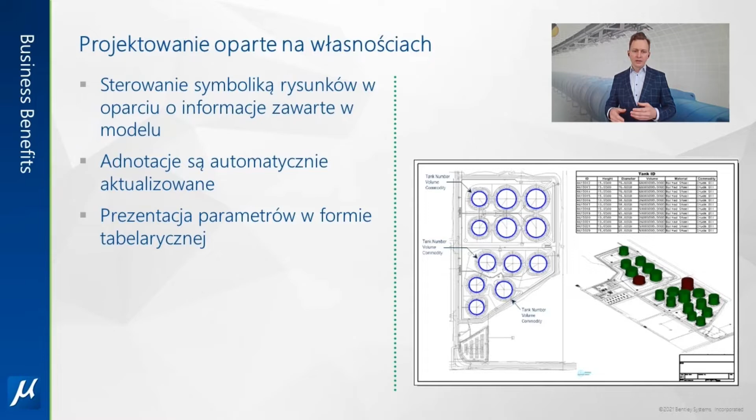When creating documentation, we base it on the pre-prepared parametric model. Those drawings have individual elements which can be included in the project, and these can generate information with full integration with the model, which means that after preparing a sheet, you can still make changes which will be reflected in the documentation.

Now, where can MicroStation be applied in the design process? First, terrain — you can usually get information from surveys, as our software works with different formats, and it's easy to configure.

In architecture, drawings are based on models, which means more accuracy and more reference possibilities. In the final model, you will be able to add more individual references, and you can easily handle this, and create views — this is the first step to BIM.

In technical design, you are free to design architecture elements, and with item type features, you can freely report things. Combining all these features with the efficiency of MicroStation, it is a wonderful tool for coordination.

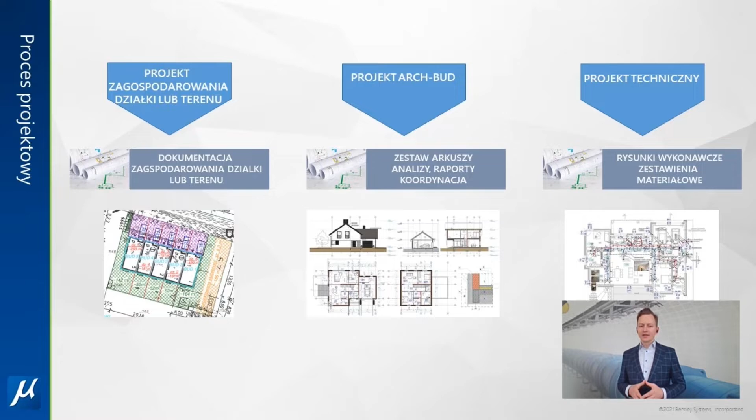What needs to be stressed is that in individual stages, you can involve different applications, and the common denominator is always the DGN format. So that's the introduction — now let's go to the substantive part of the presentation.

Welcome, ladies and gentlemen. My name is Dorota Mulińska, and I have been involved with BIM since 2016. I started with inventory taking in Architect and Revit, both on modeling and projects, and I have also been providing training in Bentley systems, where as a consultant I am in regular contact with users.

I concentrate on MicroStation and OpenBuildings Designer software, particularly for configuration and creation of company standards. I also concentrate on calculation software and generic components, and I teach some courses at AGH University in Krakow for postgraduate BIM studies.

Now let's go to GeoPortal. On the right-hand side, let's select data to be downloaded. We can find NMT data. I select option number 1, and with this I can upload point clouds for the entire country.

Now let's go to the area of Krakow. You can see there are some tiles, and these are separate point clouds, and we need to select which one we want to use. Next, you click on one tile, and what you get is an option to download the point cloud as LAS format.

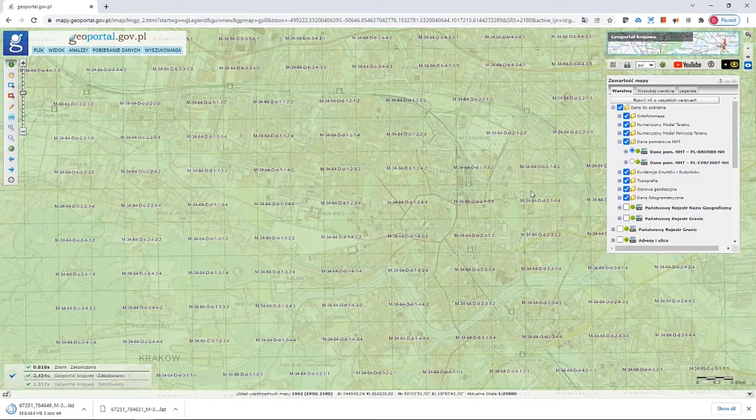Let's select one tile, and next, we will go to MicroStation. Let me mention that this data is totally free of charge, so it is good to use it.

Now let's go to MicroStation and create a new file. Let's name it terrain.

Before I import point clouds, we coordinate the file. On the right-hand side you can see this mark - this globe with this cross. It means that the file is not coordinated.

So to do this, you need to go to Utilities, then Coordinate Systems, and you will find tools to import and export geo-coordination systems. If you have any references which have geo-coordinates, you will be able to download those geo-references from the pre-existing reference, or you can send them to a reference.

But in this particular case, I will use the first option, from library. That's where you will find libraries with geo-coordinate options. You can also use search - you need to key in the name of the system, and the entire library will be searched.

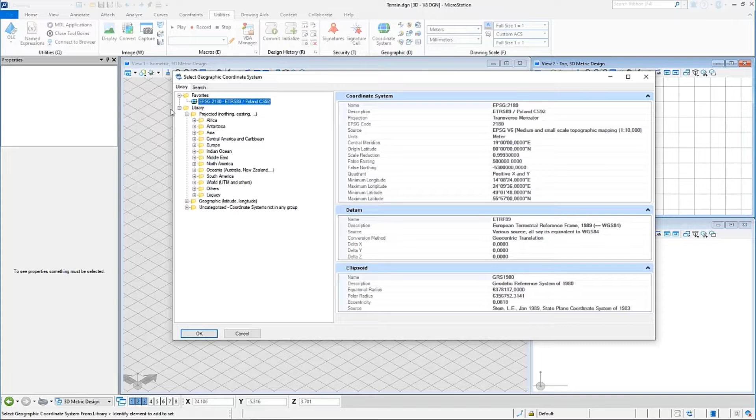You can also save some of these as your favorites, and they will be displayed at the very top. So I will select System Poland CS92, and as you can see, this file is now geo-coordinated. We have detailed information on the geo-coordination system, and on the bottom right corner we've got green icons telling us that the file is geo-referenced.

Next, you need to import cloud points. Let me use the search field - I will type in point clouds and I will find the tool. It will show where exactly in the software this tool is available, and I can also start it from here. So I will select Attach Point Cloud, set the format to all files, and select a point cloud. We've got some additional settings here.

The software will automatically convert the LAS format to POD, which is a Bentley native format. And so, another cloud - let me open it. OK, save as POD. Close the window, and now I will zoom in to the geometry of the point cloud.

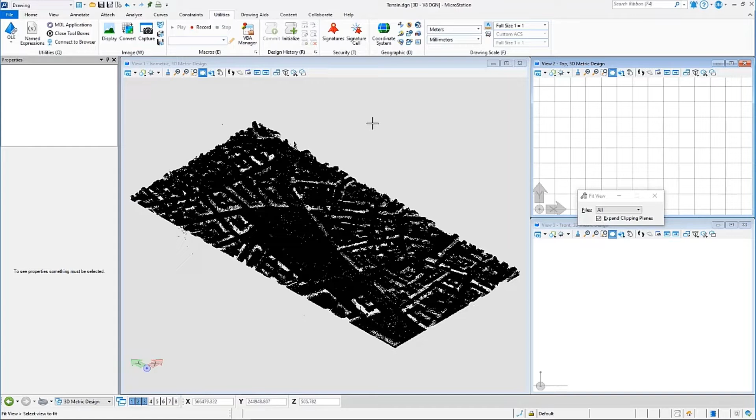What you can see here is the imported point cloud. Importantly, the cloud is geo-coordinated - so the cloud downloaded from GeoPortal has its coordinates and is located in the right location.

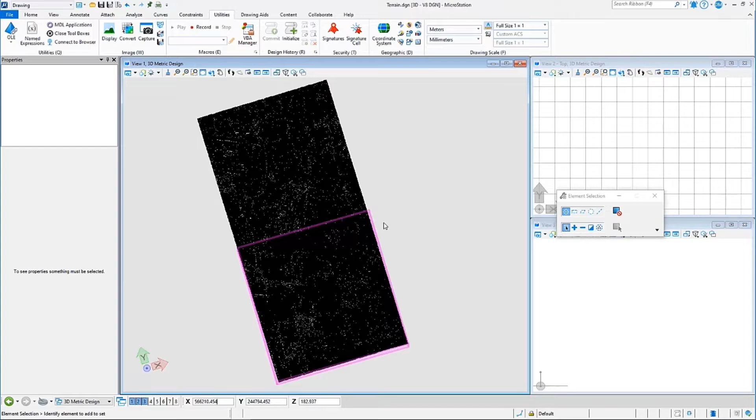Additionally, we have tools to monitor how the cloud is displayed. It is not very attractive, the display mode, but if you go to View Attributes, and under the file, if you have the point cloud here, you've got additional options to manage the view of the point cloud.

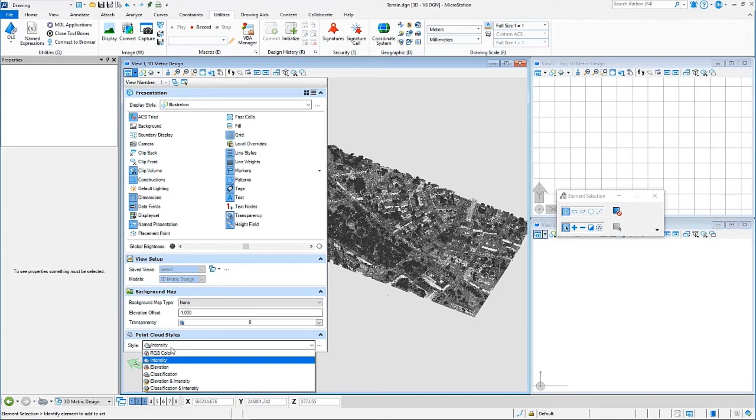You can select like intensity, so this is the grayscale. Another way of displaying is by elevation, so you can select by elevation of the elements, or next you can use classification. The cloud in this GeoPortal is prepared correctly, and we have classified elements, so using classification you can see where you have greenery, buildings, roads, etc.

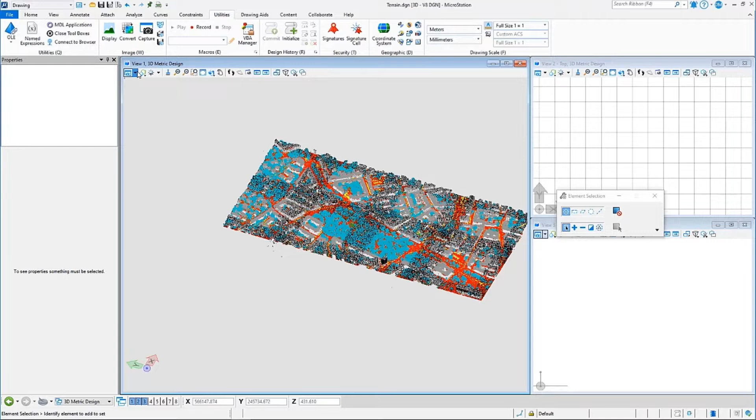So let me use the most attractive mode of displaying - this is RGB, so these are the natural colors of the geometry elements.

Additionally, this cloud has a defined density, which obviously cannot be changed. But what we can change is the thickness of the line. The cloud is based on points, so if you go to line thickness and change it to 3, your cloud will get some additional volume - each item will be thicker, and that's what I'm doing now.

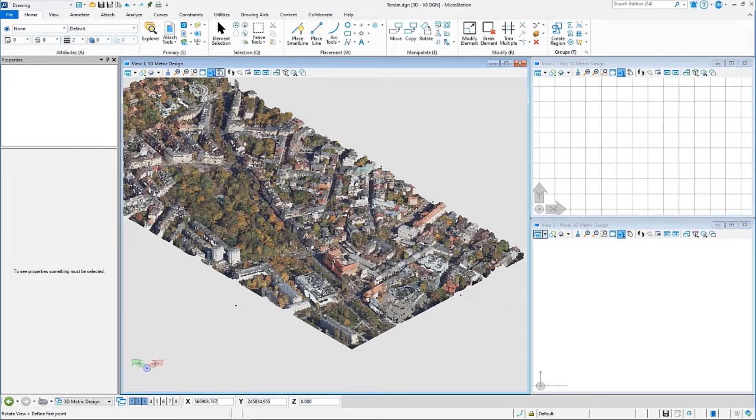Now I'm going to discuss how to plan an underground railway in Krakow. So we can go to the top view.

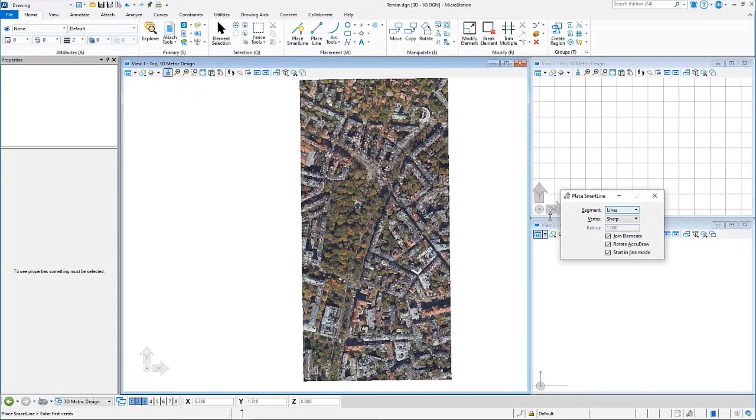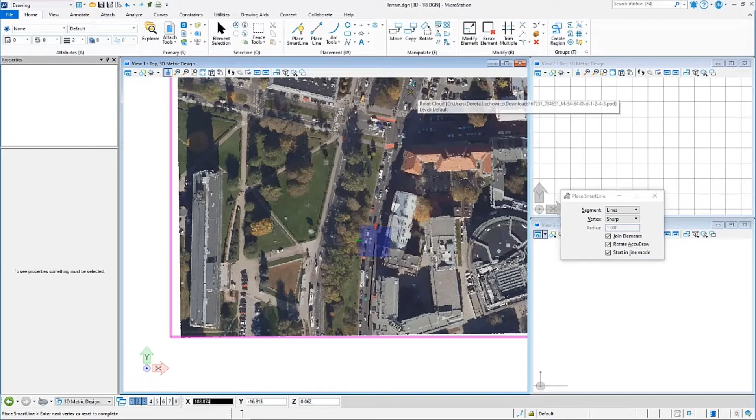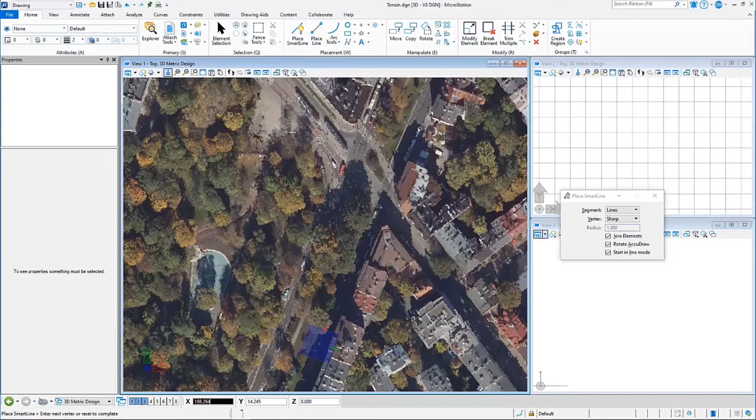That's where you can go to the insertion of lines, or curve, or place line - and that's how you create a line for our future underground railway. So we've got the area, and you can drag and snap. This line will be created on the surface of the road.

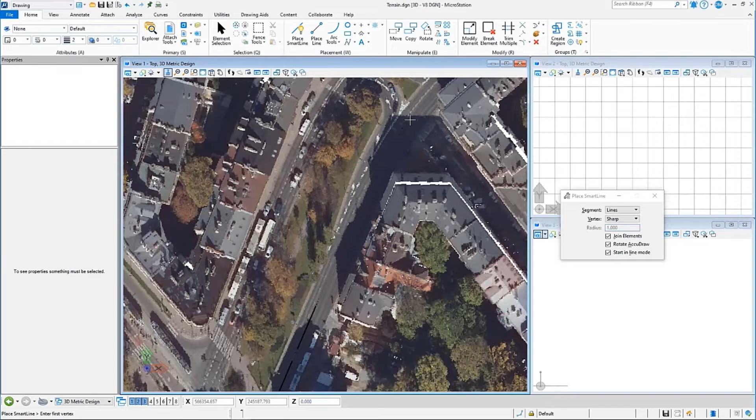Next, let me select the line. Let me go to the side view, and I will drag it by 20 meters downwards.

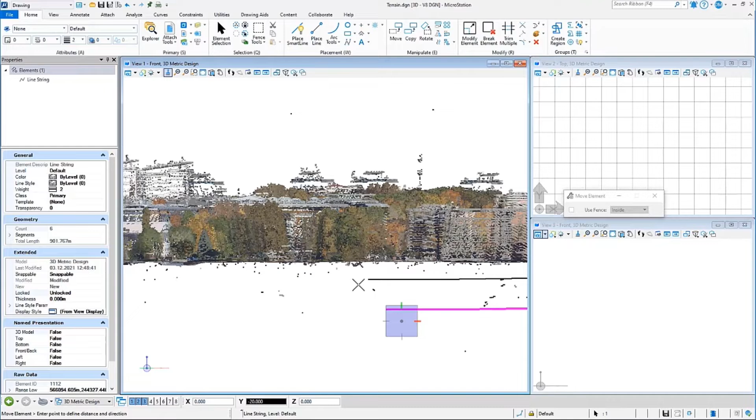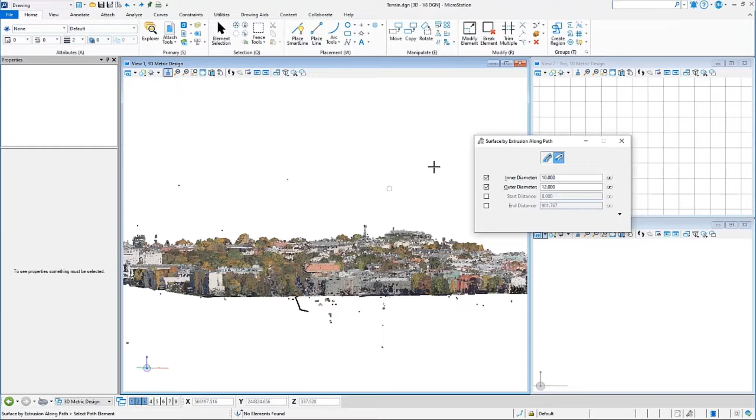So now we have this line of underground railway. Obviously, you can also use MicroStation tools for modeling or extrude along, select a profile, a line, and cut the profile along the line.

But what I wanted to show you is GenerativeComponents for parametric designing. As for now, the software is available as OpenBuildings Designer, OpenRoads and OpenRail, but next year it will also be available as a primary software, MicroStation, and in all types of software based off MicroStation. So for that end, let me launch the software.

That's GenerativeComponents. Let me open this pre-created file.

Very briefly about the software. On the left-hand side, we have this transaction pane. That's where you have all the steps one by one. Of course these can be combined or separated or change names. So this is a short history of how the geometry was created in this pane.

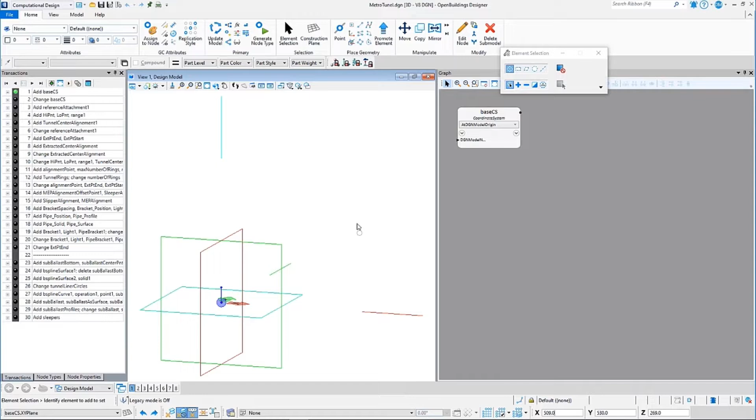And each design, each project needs to be started with the primary system. So this is the base coordinate system, which will be the starting point where we will assign all other geometry. And I will hide this starting point. This will not be visible in the 3D image view.

And I will connect some references. So we've got this reference tile. That's where you need to select host coordinate, and you need to select the file you want to connect. And the file I selected, this is the terrain file, which I have just created. And I will use now the tool.

So this is the reference which is displayed in the file. As before, of course, we can change how it is displayed, how the point cloud is displayed.

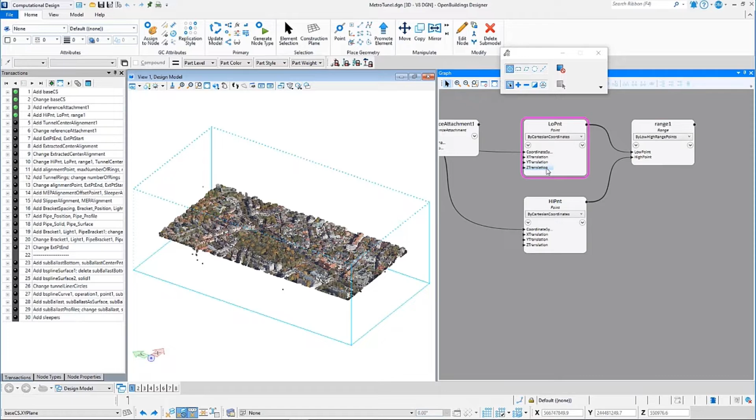And so let me now create 2 points and a so-called range box. The range box is for the geometry to be inside, and for us to be able to read information and geometry which is located in this box.

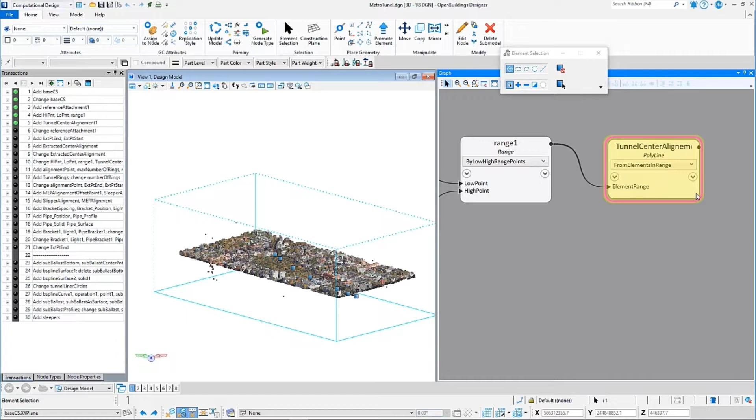To do this, I need to select the polyline tool. So this is the type of geometry which is included in my reference, and that's also where you can select some other options, like if you know which layer particularly this polyline is located, you will be able to type in this name. As we have only one polyline, this option is not necessary for us to use, but this tile will help us find all the polylines in this reference.

So now I can hide this reference, I hide this tile, and all I have is just my polyline.

What we can do now is create some additional points in this polyline using the so-called beginning and end parameter. So the beginning is 0, the end of the polyline equals to 1. And depending on the value I type in, you can control where the geometry is created.

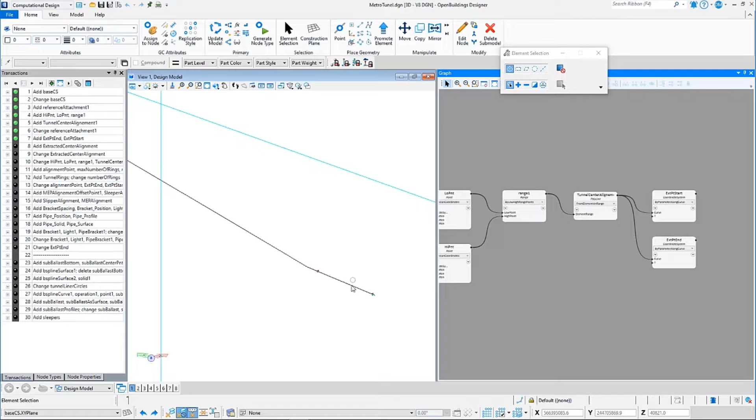And for the purposes of this showcase project, I will use just this short section, and then I will do the entire line. So you can test this on a short section.

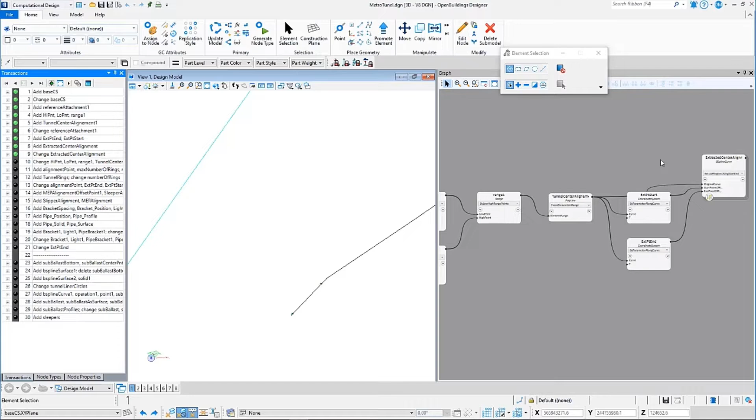Let me now launch another point. Let's create the polyline from one point to another. So we create a section of the entire polyline from the starting point to the end point.

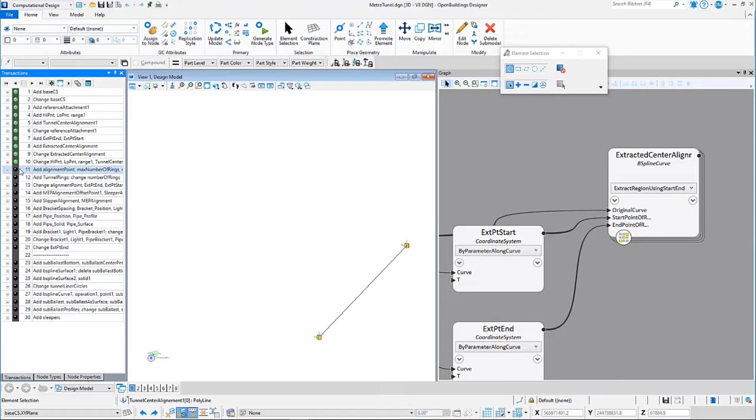Let me hide other elements so we can see just this section, and in the next step I will skip describing all the elements, but this is how you create so-called sliders. So this is to define the distance between the elements and the number of elements, etc.

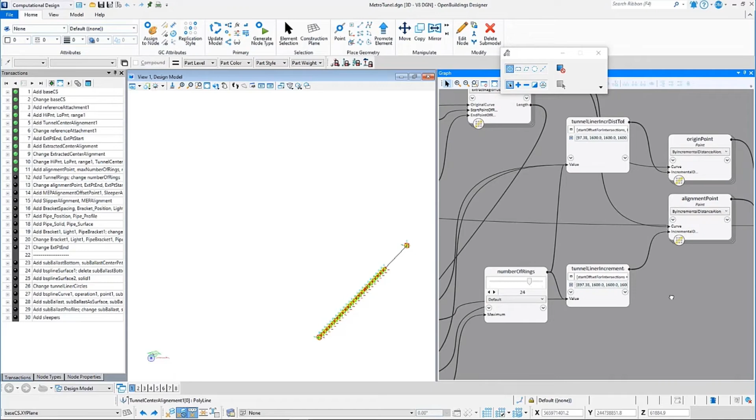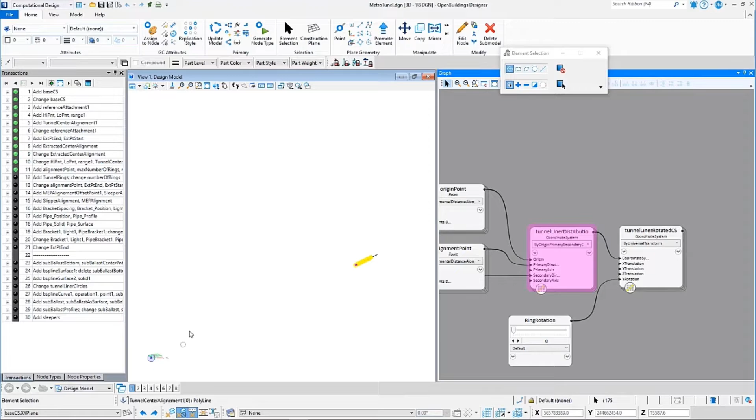And that's how you create points in the polyline where you will add a so-called coordinate system. And with this, they have X, Y, Z directions adjusted to the polyline. They are not equal to the starting point; they are adjusted to the polyline.

Next, we can create or connect a cell. This is a block. In each of these points, this is how we created a tunnel. But in fact, this is just one geometry multiplied in all these points. We have a very small section, but we could do that on the entire geometry.

Next, we will hide all these coordinate systems, not to distract geometry. The next step will be creating a shifted coordinate system. This alignment needs to be used as the center line.

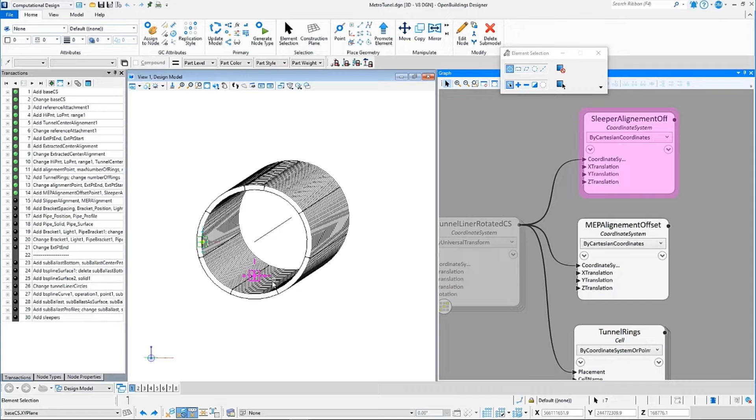And we can create another one as a bottom if we want to add tracks, or also a lateral line, side line. That's where we will use X, Y, Z values collected from the previous coordinate system.

And you can add this offset by a particular value on X. And you can also connect this with the sliders, and you can slide this distance manually.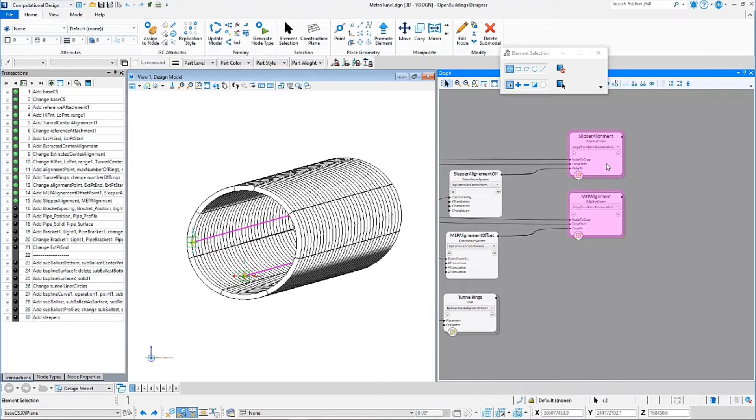In the next step, we create a copy of the line. That's the copy of the center line moved towards one or the other point.

In the next step, we create additional offsets, as the geometry we are going to insert will not be on this entire line. Sometimes we can move to the left or to the right. We can create things, and I have hidden those elements not to distract the geometry.

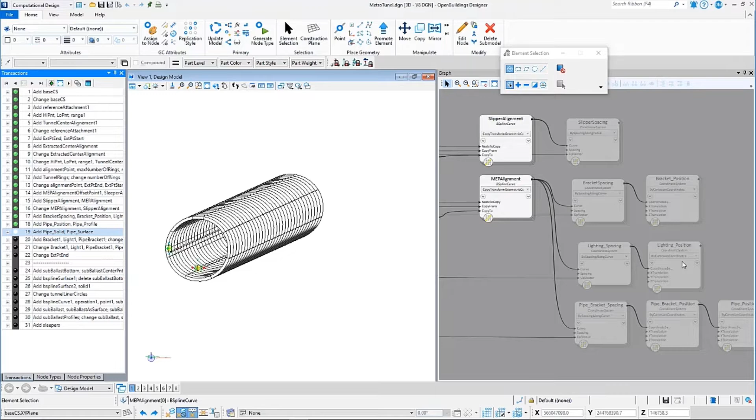And in the next steps, we will create this railing. To do this, let me switch it on for this to be visible. This one can be invisible.

So we have created wheels, multiple points based on the coordinate systems, and we have also created this layer along these elements.

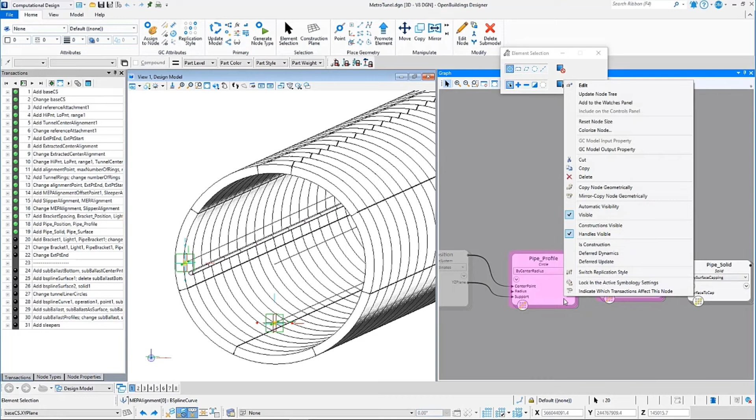And we also want this geometry to be full inside. So in the last step, we have created solid. So this makes geometry full. This can be hidden.

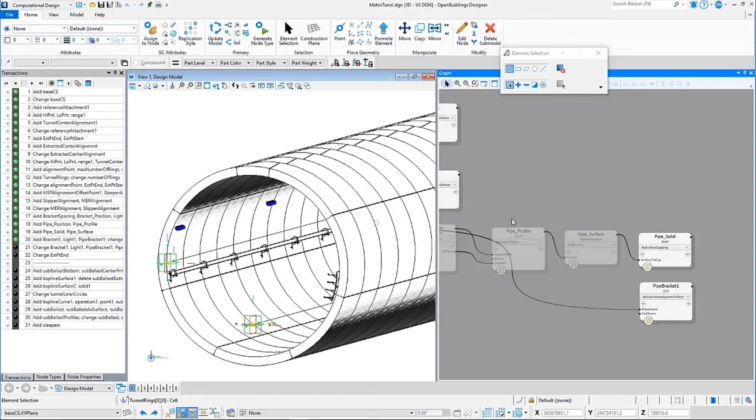And next step, as before with the rings of the tunnel, now we can add some more additional elements, like railings, lighting, handles, and this is how we can quickly create even minor elements along the tunnel. Obviously, this is only a small section of the tunnel, just for the needs of this test.

And what we will do before we finish, this is a script. The script can be used multiple times. So if we want to implement a change in the alignment in the original file, in the starting file, in the terrain, if we make some shifts toward the left or right...

...so all you will need to do is refresh your reference. You will need to go through the script again. You need to recreate all the transactions, and this geometry will be adjusted to the changes implemented.

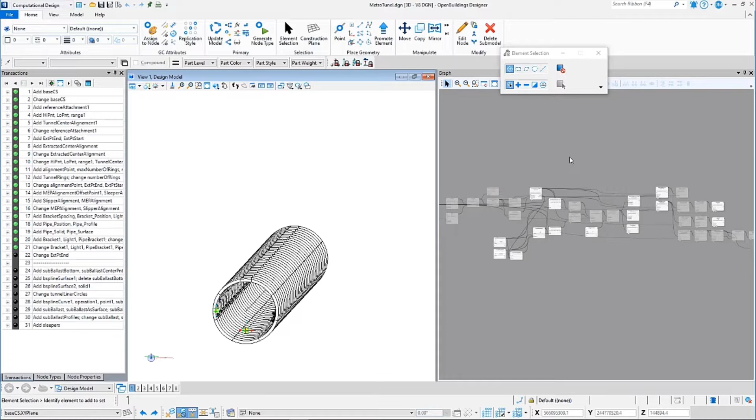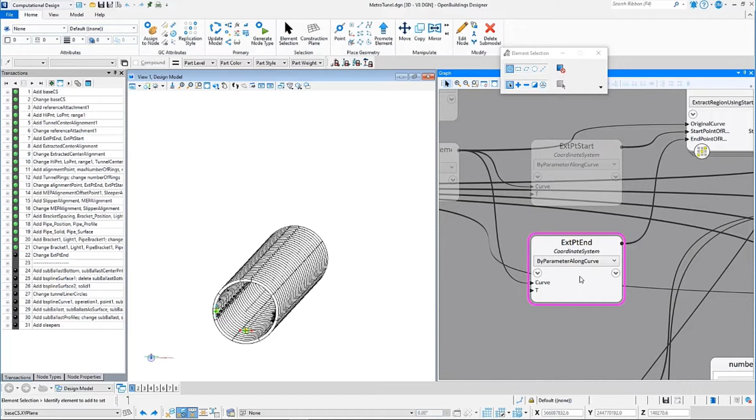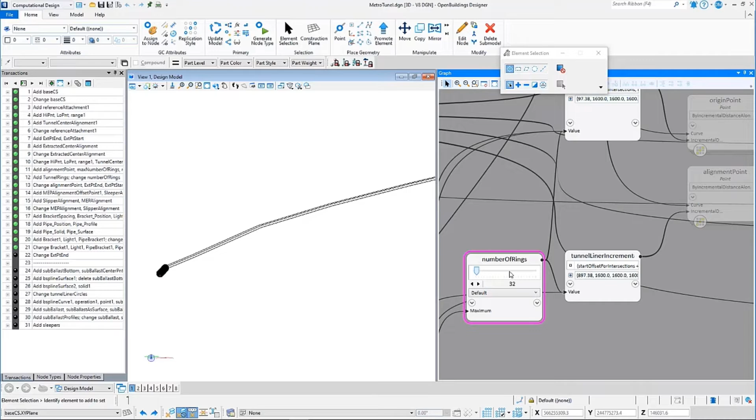As I said at the beginning, we are working just on one section, but now I can go towards the first element, and let's say I want to go towards the end, to extend this polyline to the end. So now I select the entire polyline, and it is refreshed, and a copy of the polyline which have been created are also refreshed automatically, and additionally we can increase the number of elements along the line.

And as you can see, this model is now refreshed. We have the rings along the entire tunnel. Also inside, the elements have been created.

And before I finish, I will hide these elements which I do not need, this one, and also the lines, and also the central line.

And what is left, we just need to return to MicroStation, and I will go to the reference and connect the tunnel.

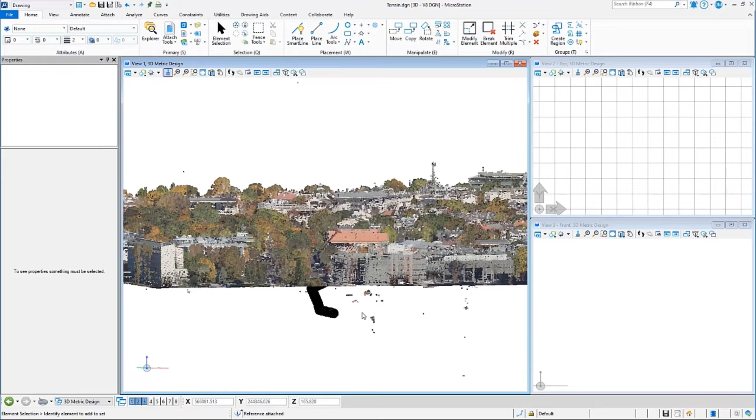Well, please note we have our tunnel connected, everything done fast. As I said, we can change this alignment and the tunnel will get adjusted and reference will be refreshed. And what we will do additionally here, we will go to the top view...

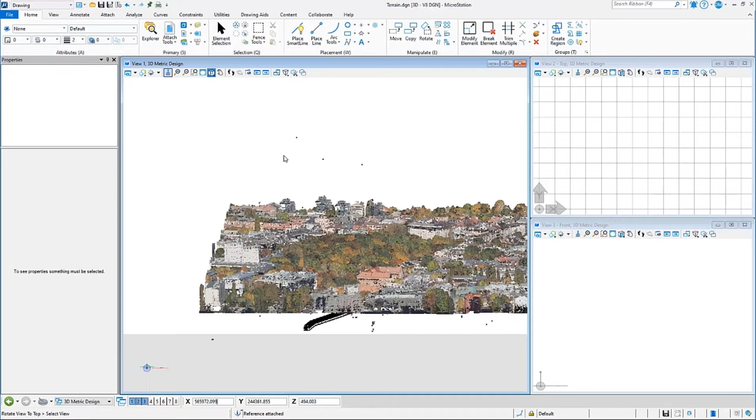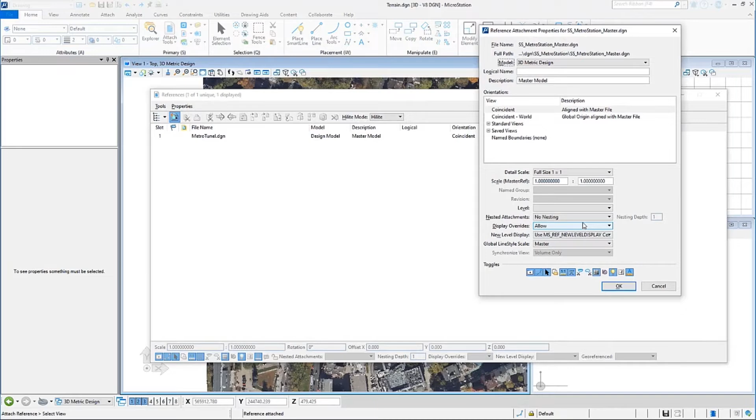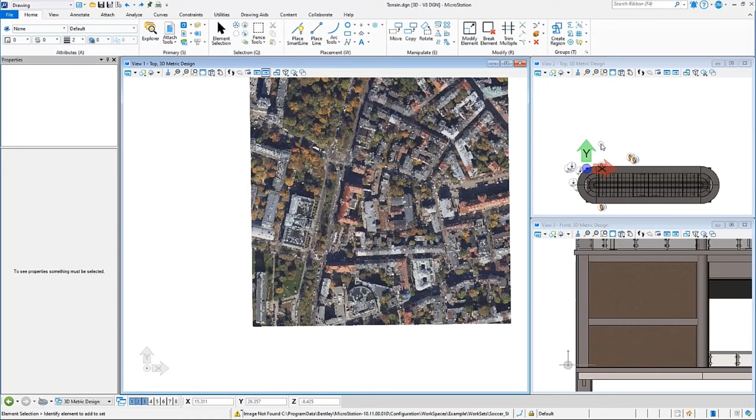...and import an additional model of the underground station. Of course, this file, not geo-referenced, is created in 00 of our file, therefore it is located very, very far away.

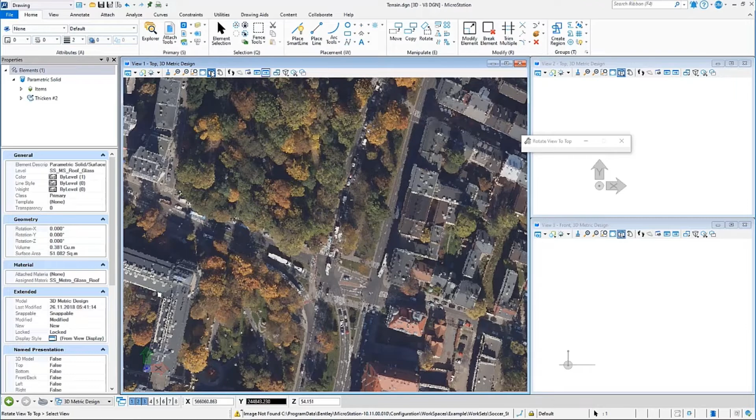With right click we can select move reference option and shift it to this location, for example. And then let's go to the side view. We will have to lift it up a bit.

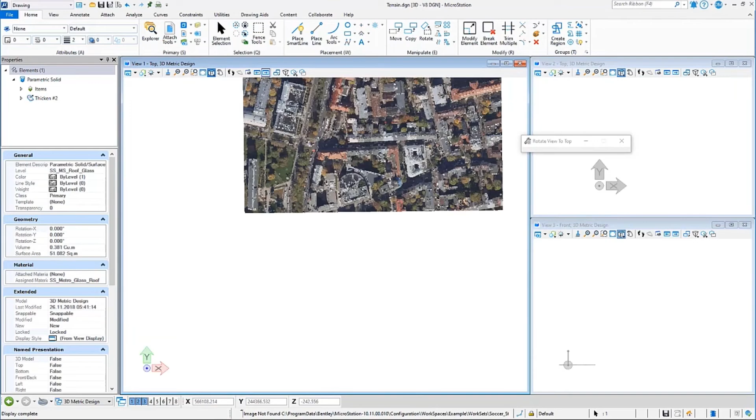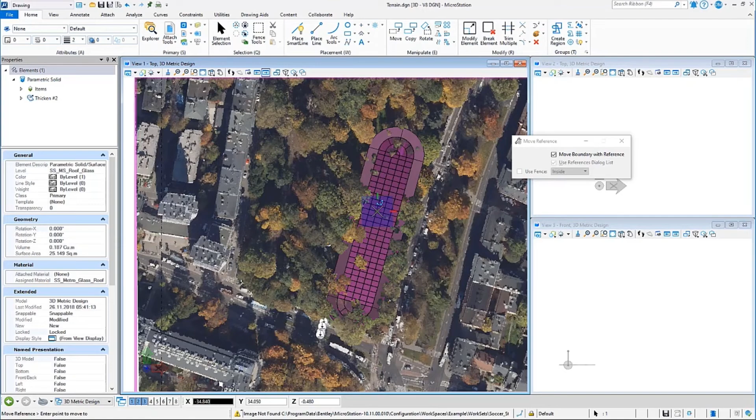Well, let's turn it. Rotate, shift. And what we will do now is, of course, the cloud is disturbing us a little bit. It's going into the area of our station, so we can edit it.

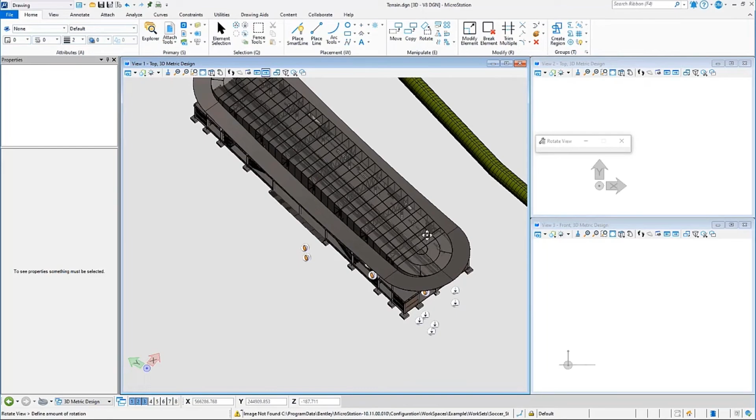Now let's move back to the Cloud Management tool, and for a moment we will hide the clouds. Next we will go to the tool named Extract Faces/Edges, and thanks to this, in our station we can select given elements, or we can outline it manually, or we can select elements. I will focus on the roof because we do not want the trees to be entering the roof space, and we can select such an option here.

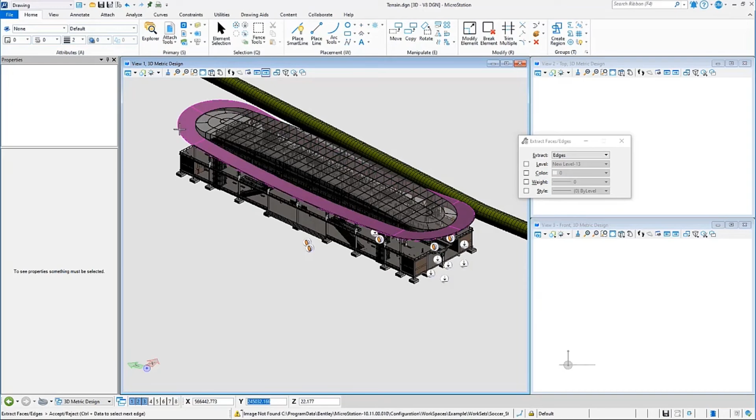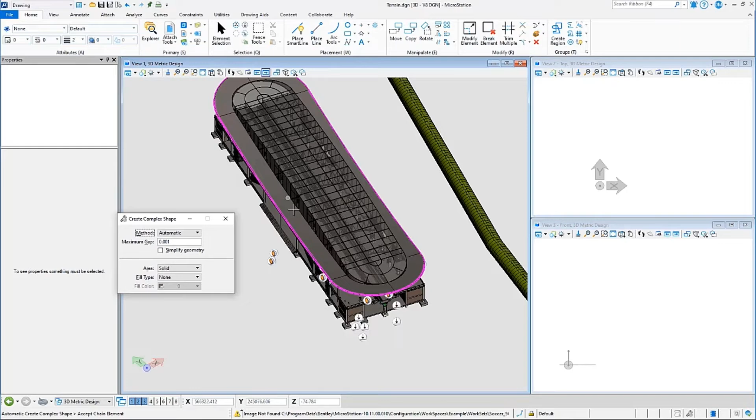We click on these elements, and then we will create a so-called complex shape from it. Option automatic, we select one and next portion, so we get the whole outlining, and geometry has been created, which we will use to cut out from our cloud.

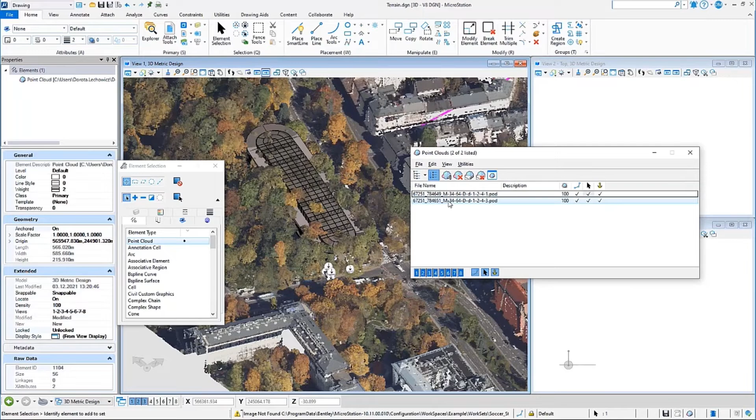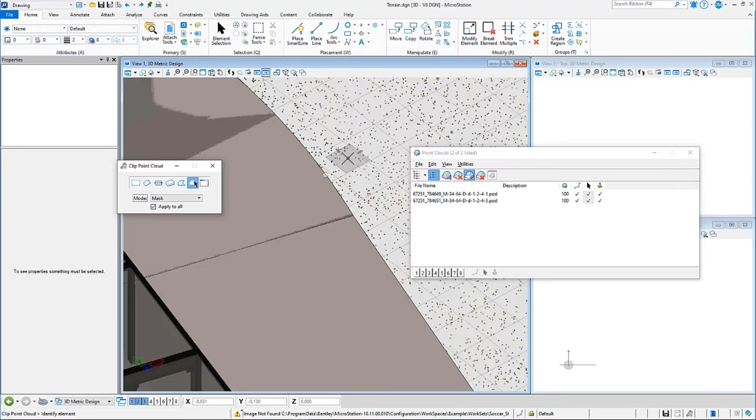To do this, we will get connected again to our cloud. Next, we can select the option to create a mask. Here, of course, we have a lot of options available. We will select by element, and we'll select the shape we have created. Our cloud has been edited.

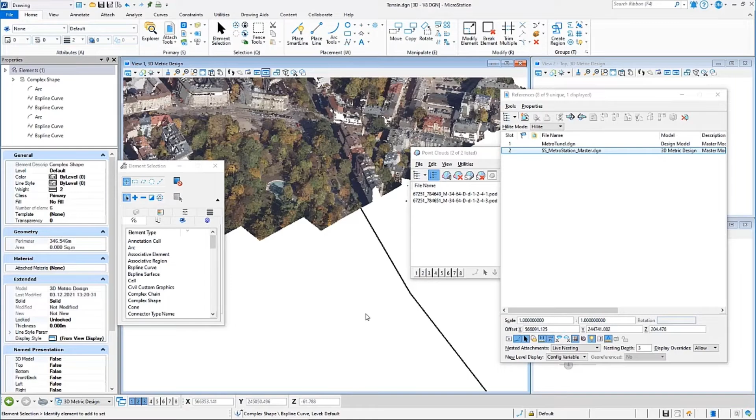In order to confirm it, we can, for a moment, hide our station. This shape, of course, can be removed because we do not need it. Well, our cloud has been cut out from this portion, and thanks to this, our station is not entering the cloud.

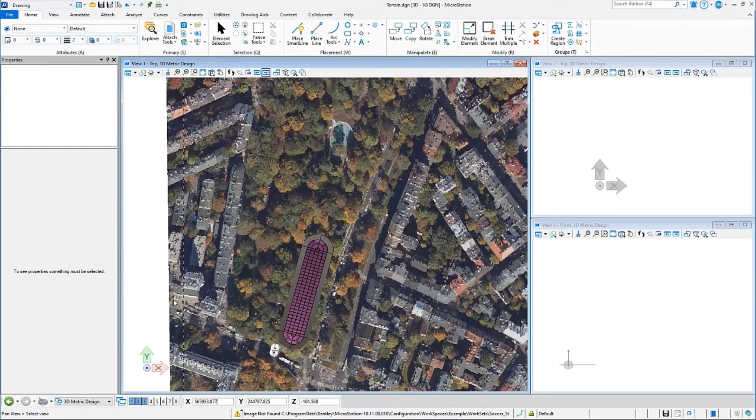And what else we are going to do here? We will look at the way of creating the drawings. In order to do it, we have additional tools facilitating this work. We can create so-called ACSs, that means a new system, X, Y, Z, and here we have a lot of options.

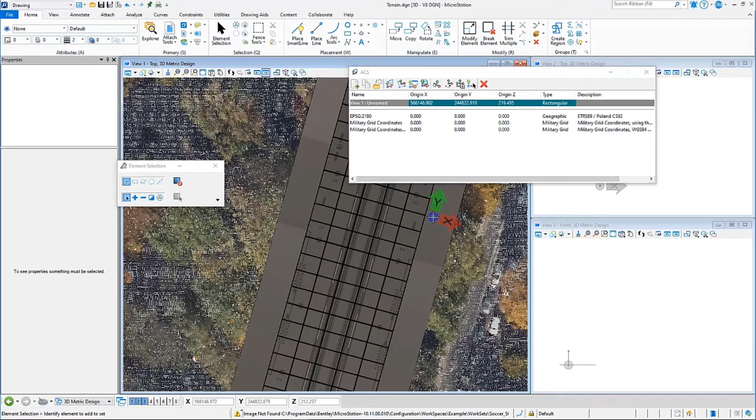In order to create it, we can do it based on 3 points or based on an element fitted to the view, and so on. Let's choose the option Align with Element. We select a point on our reference, and we have created such a starting point.

If we move on here to blocking the so-called ACS plane lock, we select this option now, and we select the top view. This view will get adjusted to the active ACS, so we have a rotated view into appropriate location.

Then we can use the tool for creating cross sections. We select seeds, so that means a template for our drawing. And additionally, what we have here, when we have point cloud imported to our model, to our file, additional option appears here: point cloud and so-called tolerance, which is available only when in the model there is a reference to the point cloud.

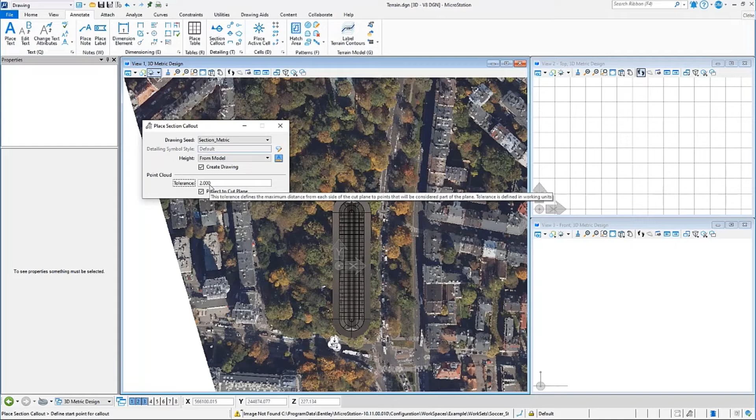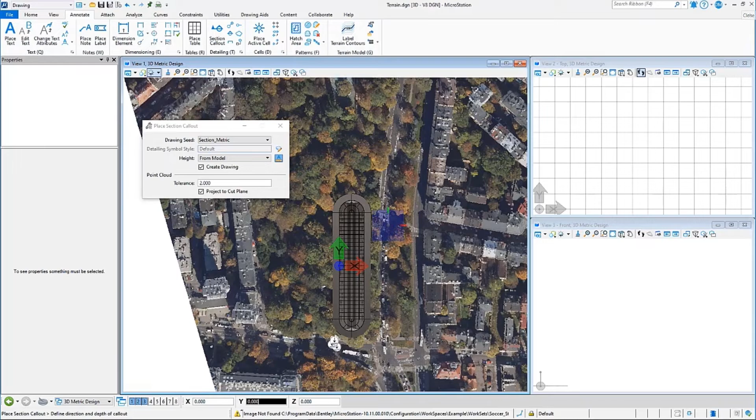And if it is switched on, the points in specified tolerance range will be projected on the cutting plane. If it is switched off, points will be displayed in a real 3D location, so it may happen that we will see individual points only. Once we set a bit bigger tolerance, we will see more of these points, so this context will be better visible. Then we select points in which we want to make a cross-section, the depth of it.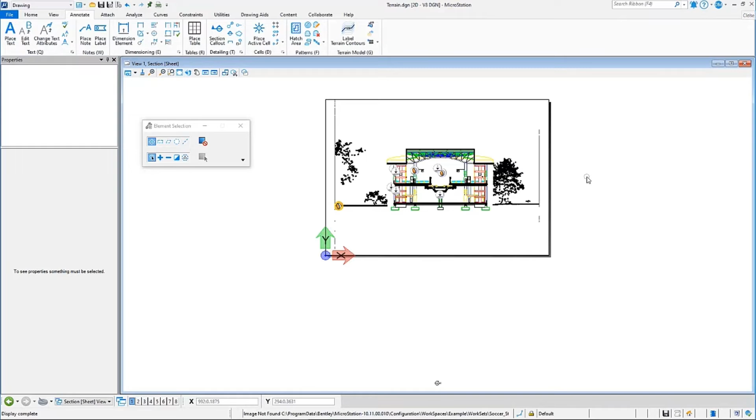A window will open for creating a drawing, and here we can create a drawing only. In the same step, we can create a drawing and a sheet on which this drawing will be located, and I select option OK. We can see a sheet has been created with the inserted drawing.

Actually our drawing is a reference. So we have a sheet on which we have a drawing as reference, whereas when creating the drawing, a model of the drawing and a model of a sheet has been created. So if we go to the model of the drawing, we will see that it is actually reference to a 3D model.

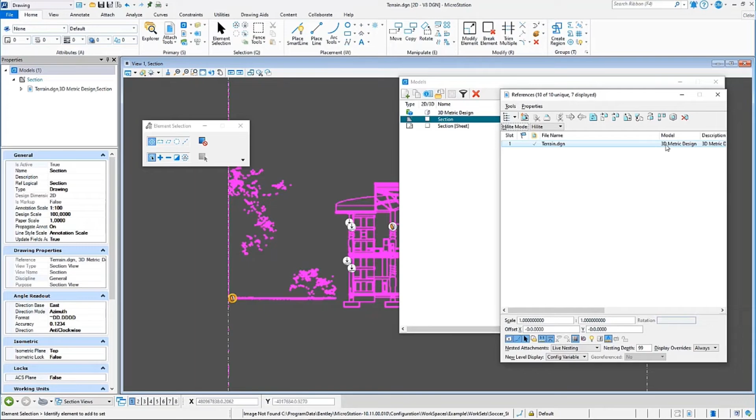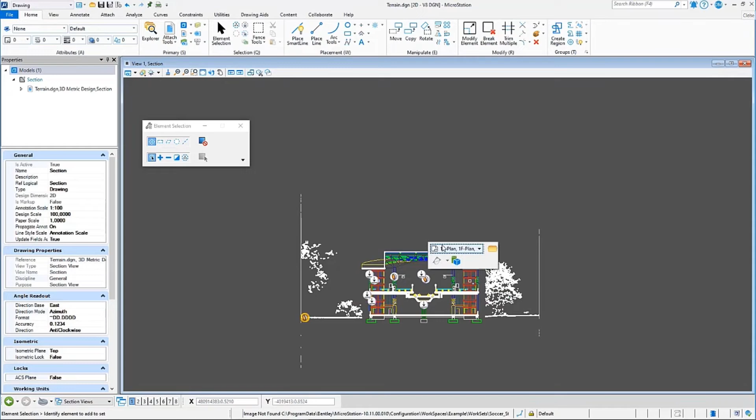Additionally, here we have, well, we can see white and yellow icons. These are so-called markers. These which we see here come from the file in which our station is, whereas this yellow one informs us that we are in just this very cross-section. Such a marker allows us to directly move from this marker to the model of the drawing or to the model of the sheet. Of course, we can also make use of other markers and move directly to the given file in which the given drawing or sheet is placed.

Additionally, here we have an icon allowing us to move directly to the 3D view with applied clip volume, creating this drawing.

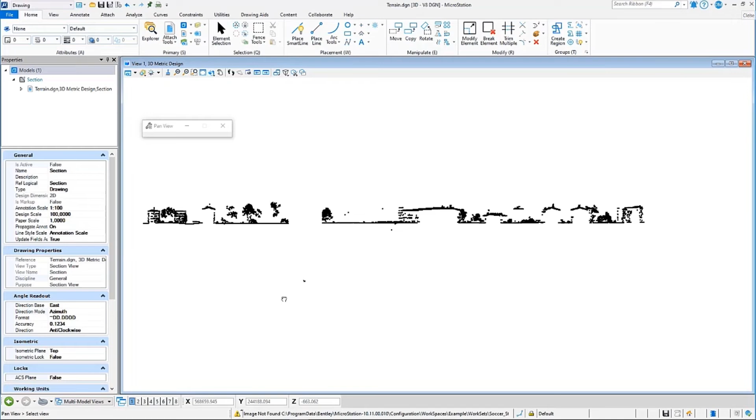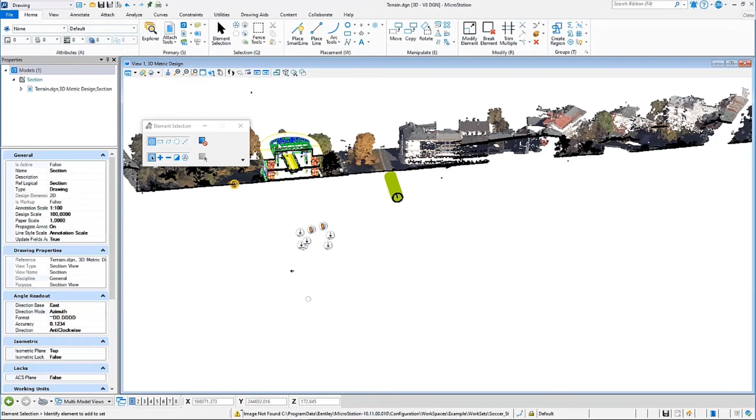If we click on it, a 3D model will be opened with our point cloud, cut to its appropriate places, both in the cutting plane and depth of the projection coming from our drawing. So thus we can also see

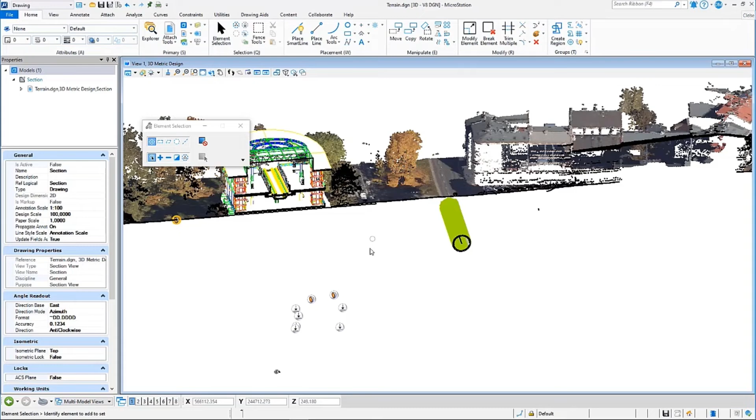what the surroundings of our station look like. Good. Next way of creating drawings, which I would like to show you, is creating drawings alongside the line. It is very useful, especially in linear projects. Here we actually had drawings in volume, whereas in linear structures, it would be useful to do drawings alongside such an element. In order to do it, let me remove our clip volume.

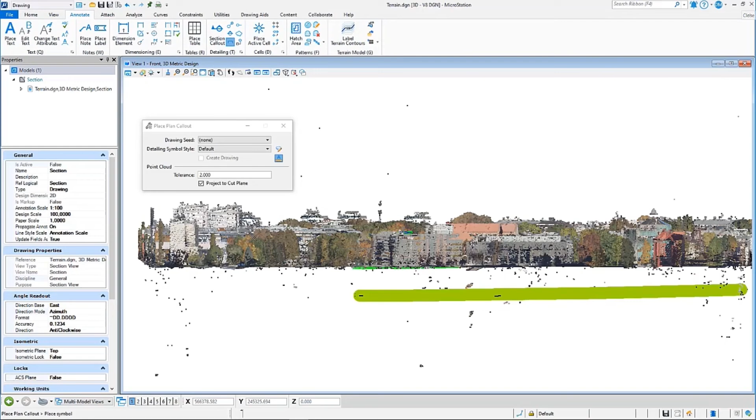We'll be back to the whole of our drawing or model, and we'll move over to the side view, and let us create a projection going through our tunnel. So we are creating the drawing, and we have created a projection alongside the whole element.

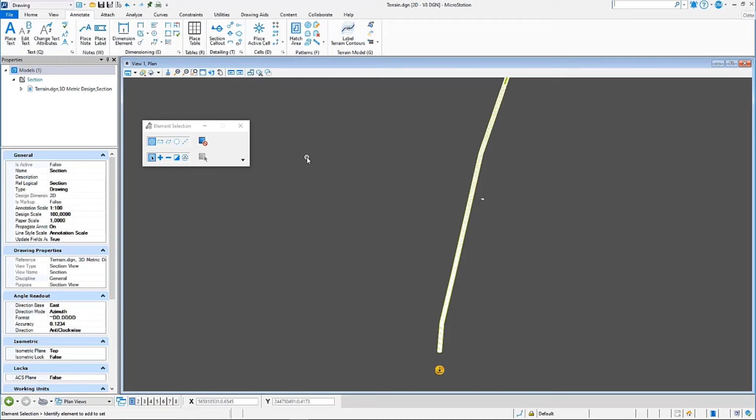Now we can create individual drawings, so we can enter the tool, named boundary. The tool allows us a lot of individual options in line, but we also have an option to create so-called named boundaries along the whole element.

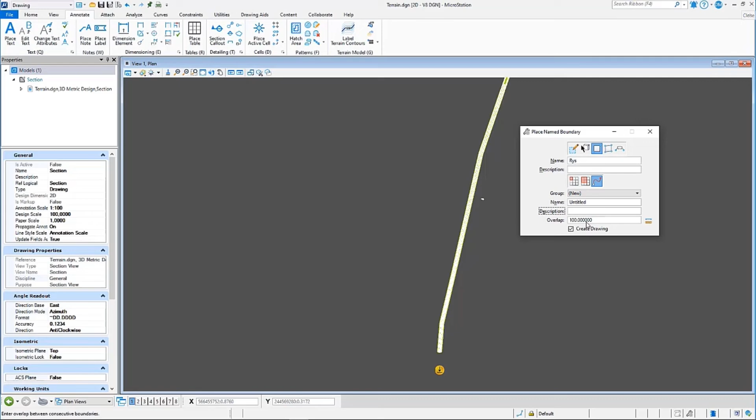Additionally, we can select the name of such a drawing and how much they will overlap. Additionally, we select the create drawing option, which will allow us to automatically create drawings.

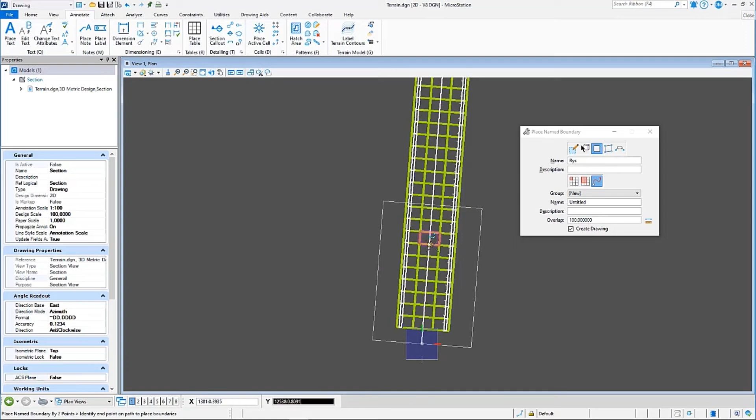In the first step, we have to determine the size of such an area, for example, this one, and then we select the initial point on the line along which we want to create drawings, and then the end point. Of course, we can go to the very end, or we can select some intermediate point.

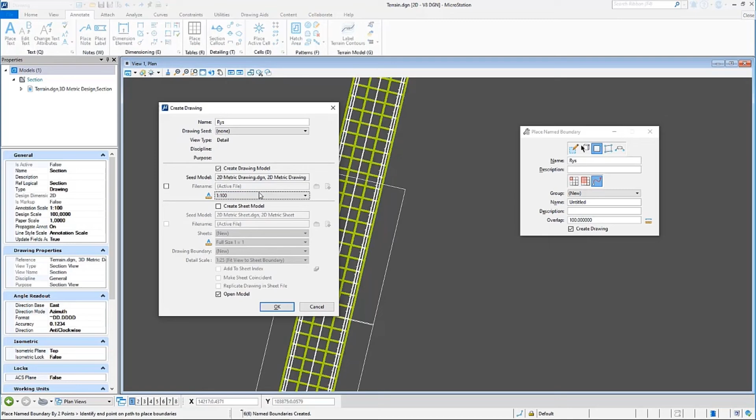A window will be opened for creating drawings like before, and now we will create drawings only. So we can select scale, and we choose OK. Thanks to this, we can see that automatically we had 6 drawings created

which now, of course, we can open. And as I mentioned, each of them will be slightly overlapping the next one. We can, of course, describe them and put them in the sheet and print out. So it's a quick way of creating drawings.